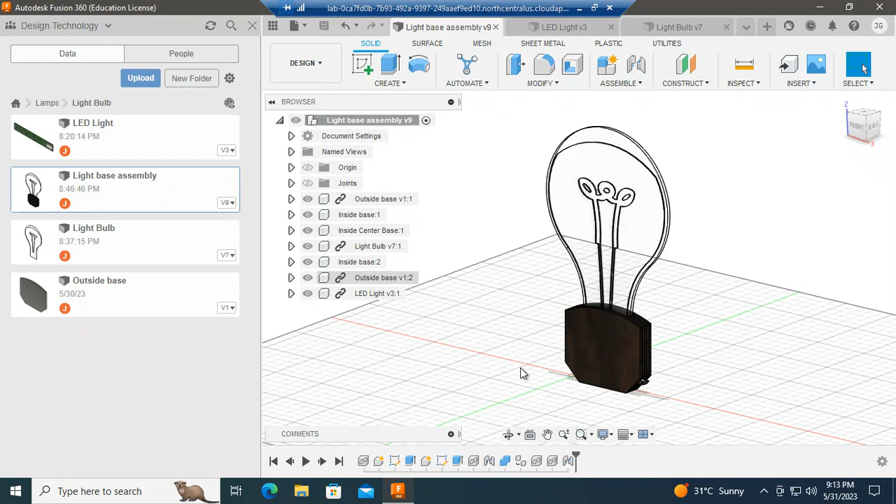Hi, I'm going to show you guys how to create an assembly using Fusion 360 where the components are related to one another. I'm going to make something similar to this, where I have 5 layered pieces. Some are the same and some are different.

I'm going to turn a few off so you can see. The inside ones have this gap here for a light piece that we are going to make for a grade 12 project, and then show how to bring a couple of these different layers into an assembly.

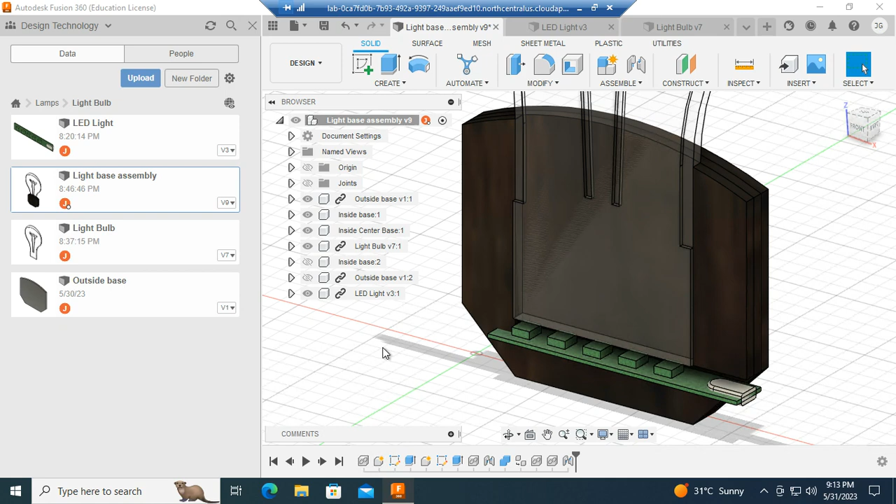The first thing I'm going to do is use this piece I already have open, this outside base. I've already made it, so I'm going to bring it into a new assembly. First I have to press this plus sign and create an assembly. I've got to save it right away, and I'll call it light...

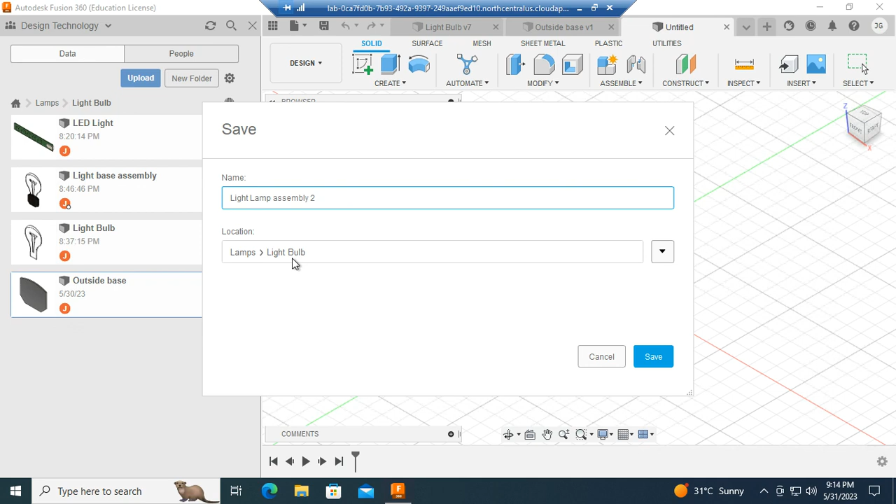Lamp assembly. I'm going to call it 2, just so I know it's different from this one here. I've got it in the right folder, and I'm going to press save.

The first thing I do, there's nothing in it. This is the assembly here, it's active, and I'm going to bring in a component. This is the one I've already made. I'm just going to press OK, leave it at that spot, and ground it.

The next thing I'm going to do is actually work in the assembly to create a new component. The assembly is active, and I know it's active because it has this circle with the plus. If I wanted this one to be active, it would have the circle and plus there. There's only one component, so I'm going to make this one the active one.

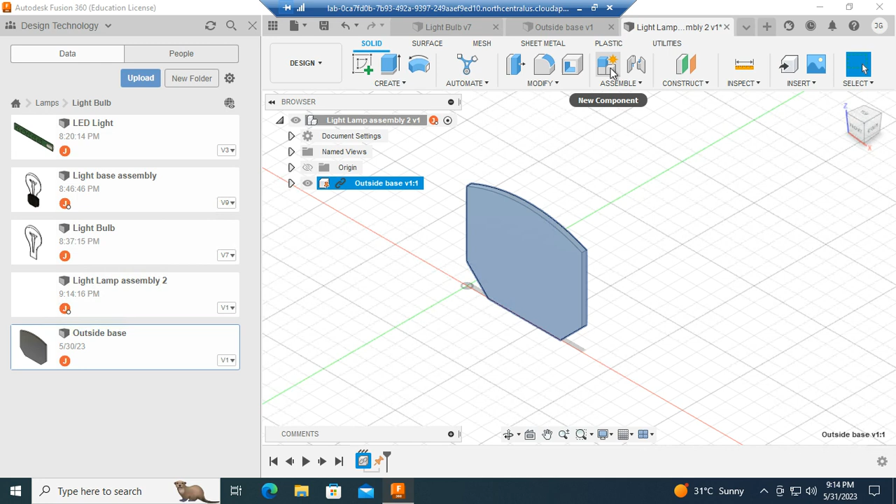I'm going to create a new component inside here and use this geometry as reference. So this is a new component, and I'm going to call this inside base 2, just to rename it.

The parent that I want to select is actually going to be inside this assembly, so I press that and press OK. Now you can see I have 2 components in this assembly. This one is the active component right now.

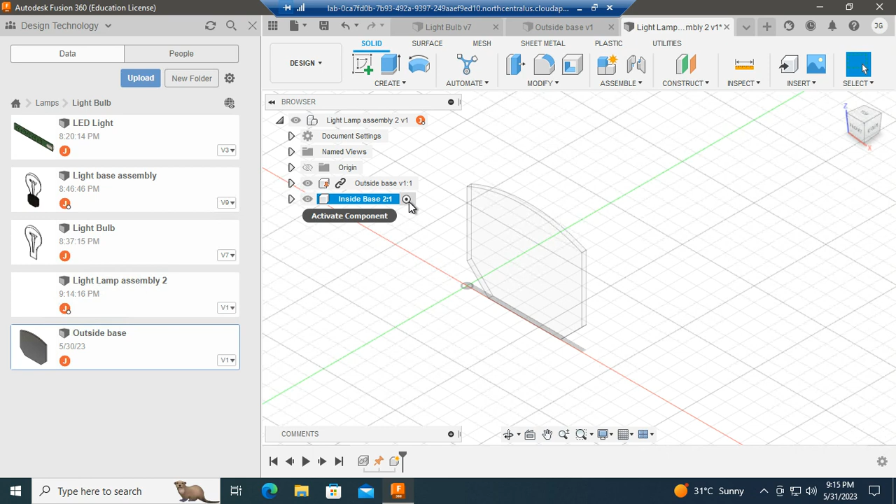It's got this circle with the dot, and I'm going to create a sketch. I want to reference this surface here, and the first thing I want to do is use this outside shape. It's going to be related to this component, so if I change this component, this one will also change.

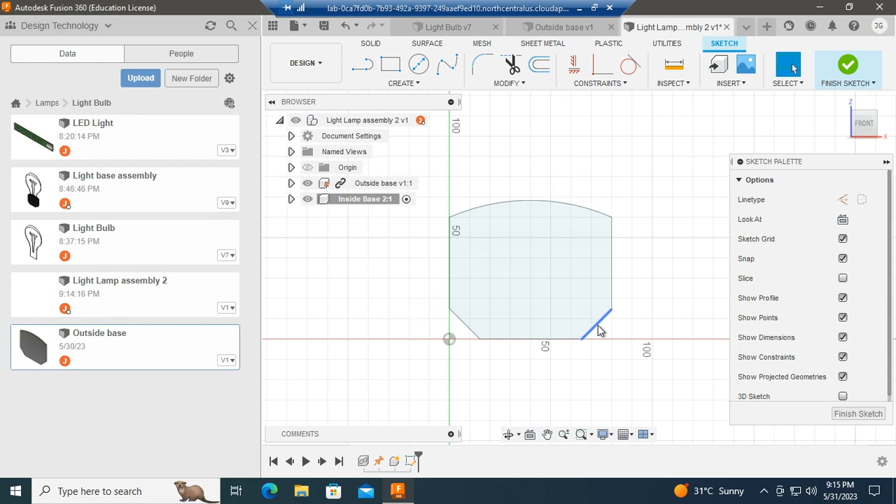But for this, I want to have a little cutout in here for the LED light, so I'm going to add a bit more geometry to it. I'm going to start here and create a feature, and then dimension it first.

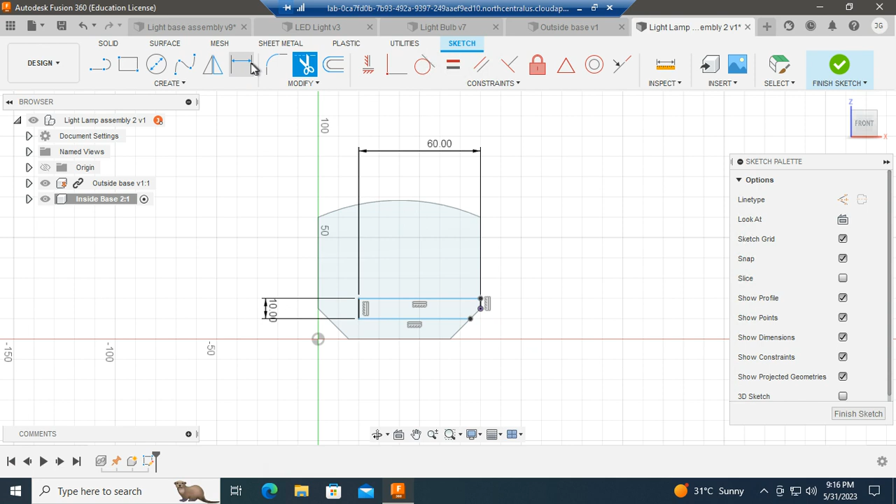I'm going to say I want it to be 60. Perfect. And this should be 10. Then over here I've got to trim a piece right here - just trim that piece and that piece there. Now I've got to add a few more dimensions to it.

Now all the components are black, which means they're fully defined, and I can trim this one away as well. So I have a fully defined sketch, and I can say finish, and now I want to extrude it.

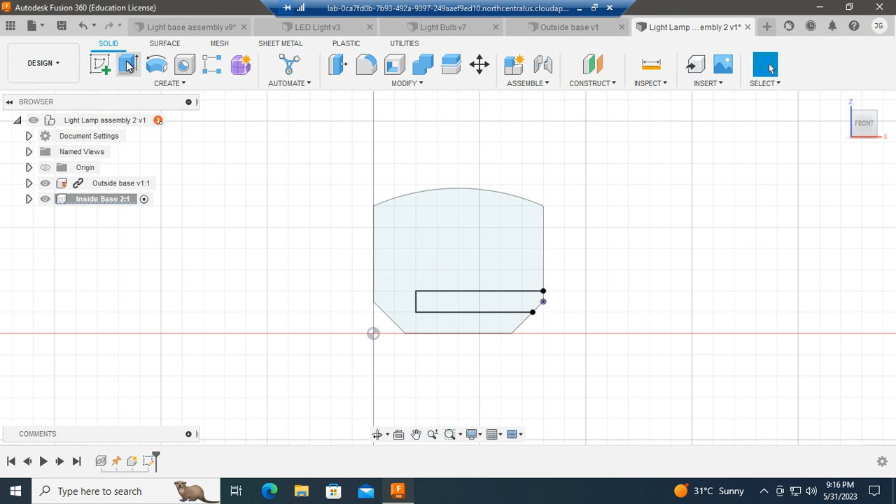Because it's still active, I'm going to extrude this surface, making it 3 millimeters, which is the thickness of the wood. Now I have a second component in here.

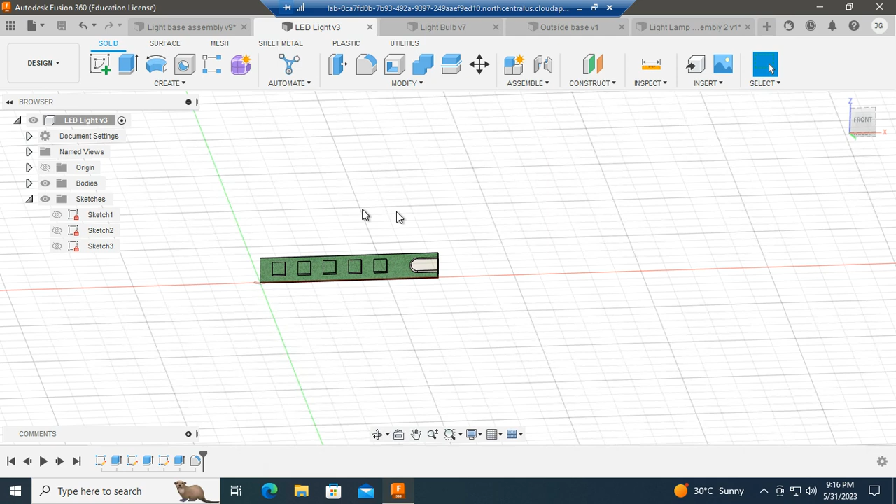Now I want to create a second one of these, because the light that goes in there is actually going to be a lot wider. We're fitting this LED light inside this cutout, so we actually need to layer this 3 times.

Right now this component is active, so I have to make this the active part. I click right there, and now that's the active part.

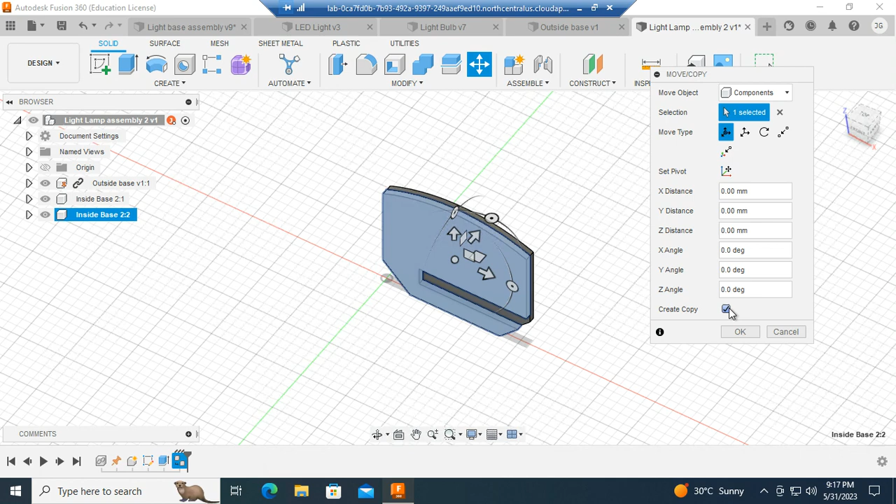So what I'm going to do is go here and say move or create a copy. I want to make sure this is checked off, which means it's actually going to make a second copy of it. I just want to move it over 3 millimeters, so it's basically like layering up a second component. Now I have 3 there, and you can see I have 2 of the same component.

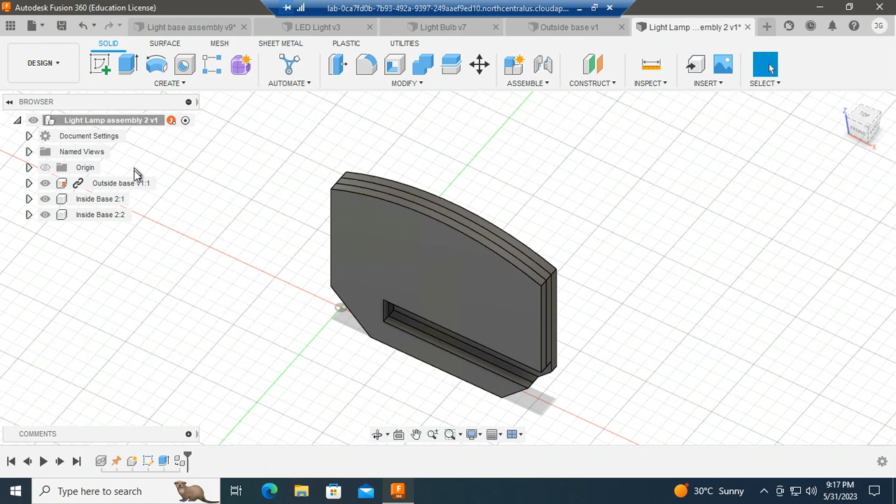So I'm going to do that one more time. Again, the assembly is active. I'm going to move or create a copy, make sure this is checked off, and move it in this direction - the Y direction. Now it's going to be -6 because it's got to go over twice. Now I have 3 layers of it.